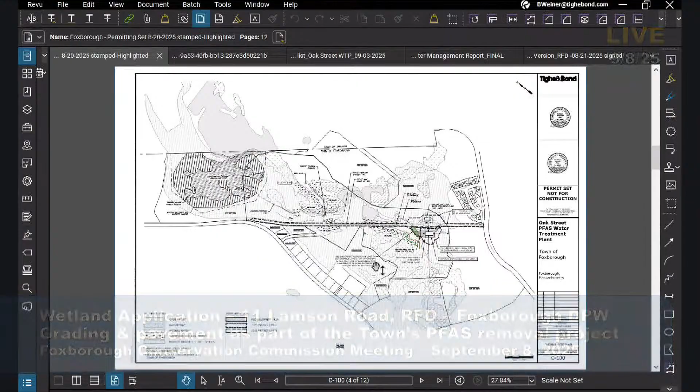Overall, this is the water department site, a 61.8 acre parcel. I'll zoom in to show some more site features. Access is from Oak Street, with a long driveway and associated improvements constructed from 2011 to 2013. Here's the existing treatment plant.

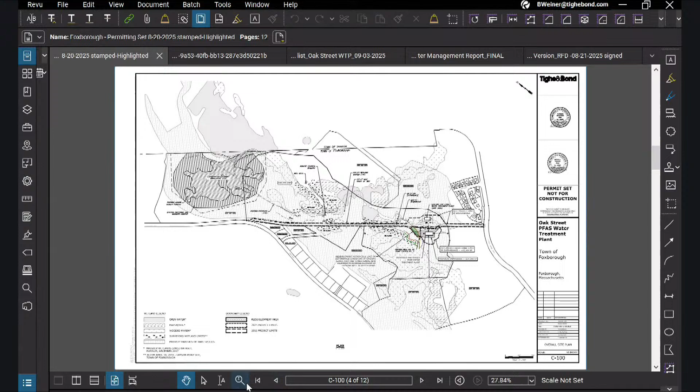We have proposed improvements in this area, I'll zoom in here and then go to the next sheet to show more detail. Here's the existing treatment plant, this is a wooded area outside the buffer, and this is a redevelopment area that's already established, grass and driveway. Our proposed RDA work is this green highlighted location, which again is grass and driveway.

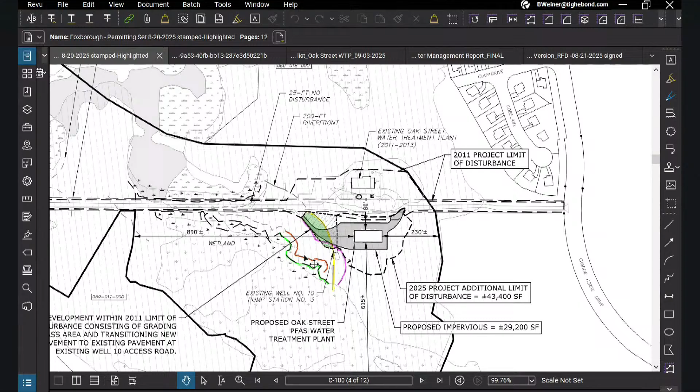We're planning minor grading for stormwater improvements and some paving to tie in the driveway, all pitched away from the existing wetlands to the south. Let me show you the existing condition zoomed in more — here's the wetland line, the 25-foot no-disturb line.

This is the 200-foot riverfront buffer, and the pink line is the 100-foot bordering vegetated wetland buffer. All of our work is near the outside edge of the 100-foot buffer. The outer first 90 feet will not be disturbed by the work, so worst case we have about 10 feet of disturbance.

We also have some disturbance in the riverfront area, which is already developed — a grassy area that goes to a culvert. We're planning some regrading, connecting the end of this pavement, which I'll show on the next slide, over to the pavement for the new building located over here. The closest we'll be to the river is 145 feet, based on what's shown on this plan.

And so we took the approach of the RDA because this area is already developed, and we thought it met the intent of permitting for this project.

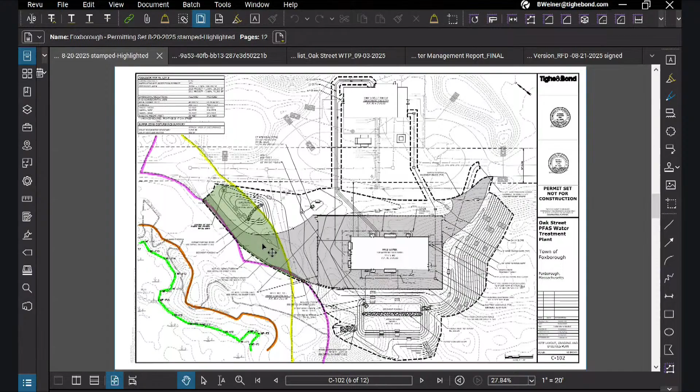In summary, that's the project before you, this area right here that's already developed.

Okay, now does that stormwater drain into the other basin across the little roadway? It does, yes. It's a low area, and it goes through the culvert and into the existing stormwater basin. So we're continuing the same drainage pattern, just holding back a little bit more to meet the calculations with completing the pavement. All of this will be pitched towards this infiltration basin.

We have a construction entrance right here, and then we have the full perimeter with wattles and silt fence.

At your other treatment plant on Pumping Station Road, you filed an NOI, and it's the same type of thing. I personally think I would like an NOI for this as well. Probably nothing will change, but due to the magnitude of the job, with the determination we have no control over anything, at least if we have an NOI, we have an order of conditions which we can get out to you very quickly, but just have some measure of control. That's my feeling. I don't know if anybody else on the board has the same opinion.

I'll show you on the next page. Yeah, the tree line, the whole tree line ends basically right here. You're going to have a lot of clearing, but that's outside the buffer, it's just the magnitude of it that gives me the feeling, so I would prefer the notice. It's just under an acre that we're clearing.

But outside the buffer—in the buffer, there's no clearing. So have you checked to see if there's any threatened habitat? Yeah, we've had numerous meetings with Natural Heritage, and the mitigation ratio is being carried forward on that 23.5 acre easement parcel. So this new work will fall under their criteria, and they have a permit for this, separate from the town permit.

Any comments, Rebecca? I don't, not at the moment. I guess if they did an NOI, they'd just submit this plan and we would approve it, but we could hold them to it. Whereas if we don't ask for the NOI, they can say this is what it's gonna look like, but we don't have as much to determine if we have nothing. We can't really stray from the plan, but there's no conditioning that we could put on the project.

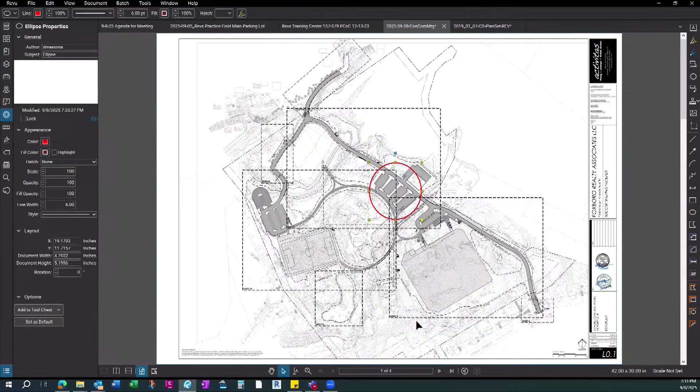That eventually runs through the closed drainage system and into the infiltration basin that's designed to detain, treat, and recharge most of that stormwater runoff.

As you can see, and I think most of you have been out there on a site walk, these islands have really struggled to come to fruition. The Kraft Group has reseeded these, I know, at least once last year. But really with the heavy vehicular traffic in this parking lot and then snow clearing in the winter time, these islands have really been beat up.

I've been on site with the Kraft Group and we've discussed with their contractor different alternatives that we could look at for these islands.

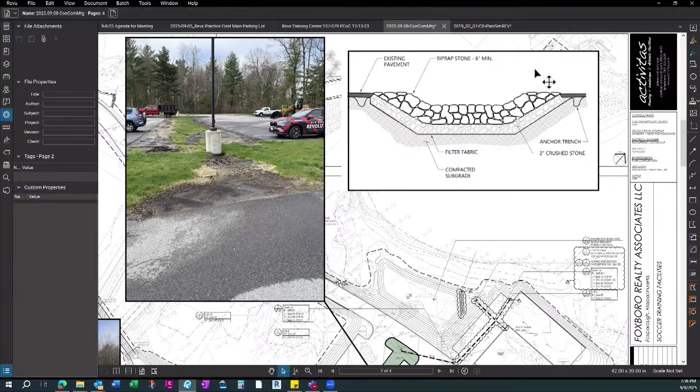Could you go back to the previous screen, if you would? Sure. Okay. How many—there's actually 3 islands in there. You've been talking about the 2 outer ones. What about the middle island? What's that going to look like?

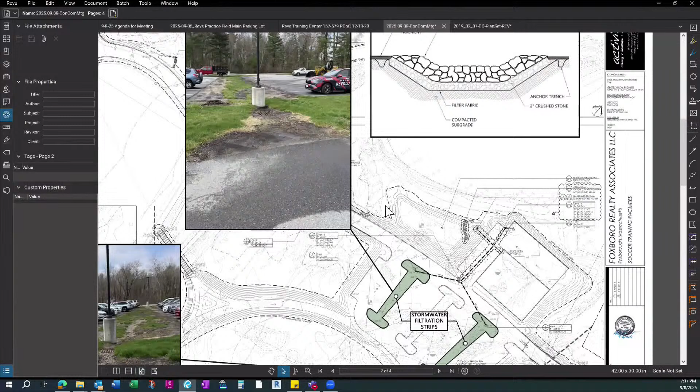I don't have a picture of that specific one. But the real issue is between both of these islands here—zoom in here. This island is actually a high point, so the stormwater runoff is pitching away from that island. So when you add the vehicle traffic, the snow plows and such, and then all your runoff going to both of those islands, that's where the issue really lies, at these 2 low points and through here.

The goal of this island would be to keep that a pervious surface. Okay.

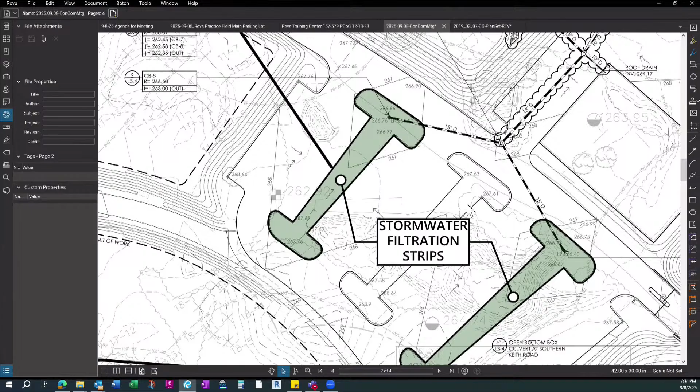Any other questions, comments?

Rich and I originally looked at this when they came in to request a certificate, and we put together those 5 additional conditions that need to be met before we would give them a full certificate. One of the biggest problems was that the islands were important as part of the stormwater runoff filtration. What's happened is that people just drive right across them in their cars, instead of backing out and turning around, and there's nothing stopping them from doing that. After so much time, they're so compacted that you can't grow anything in there, hardly.

I met Beth Friday, out there, and you could see the erosion that's occurring that just washes the seed away. She said they've already tried to replant that 3 times, and that's why they went back to their engineers and consultants to figure out another way of doing this.

I would agree that the plan being submitted would accomplish the stormwater runoff issues, and also trap any sand or debris coming off the paved areas. It will slow down the water, but the original intent was that it was going to have the grass filter out what was running off the pavement. This will do the same thing.

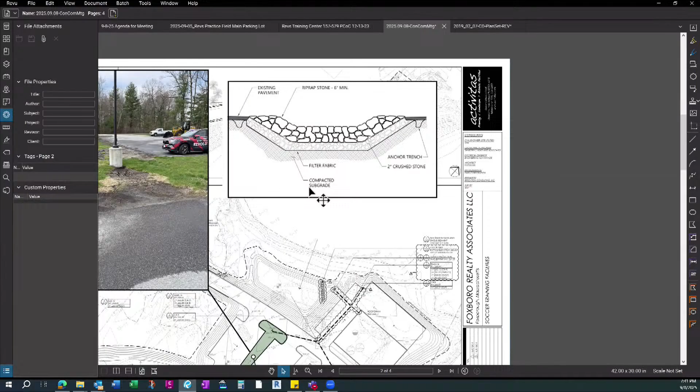Yeah, because it's been quite a few years that people have been driving across it, not only with cars but also pickup trucks and sometimes a little bit bigger trucks, so that's going to be rock hard underneath there. I agree, it's a busy parking lot, with trucks, equipment, and people driving directly across.

The nice thing with this proposed solution is the angular stone will kind of define more of a swale line through the middle of these lots. I feel like with the depression of the swale and the angular stone, that'll really prevent vehicles from driving through these. Yeah, except the pickup trucks.

This will also improve the quality of the water going into the basin, because there's a lot of sediment buildup out there that we noticed as well. During some of the heavy rainstorms, you could see the cloudiness in the basin.

Agreed. During construction, we'll obviously have erosion control measures around these. We'll have a silt sack filter bag on the catch basins as well, so no sediment gets into that drainage system. Anything else? Nope, that's it.

As Mr. Opaka mentioned, the Kraft Group's planning to be back in front of you guys next month, hopefully, to close out the rest of these conditions. This is kind of the last one they're hoping to start construction on relatively soon. The other four conditions they have completed.